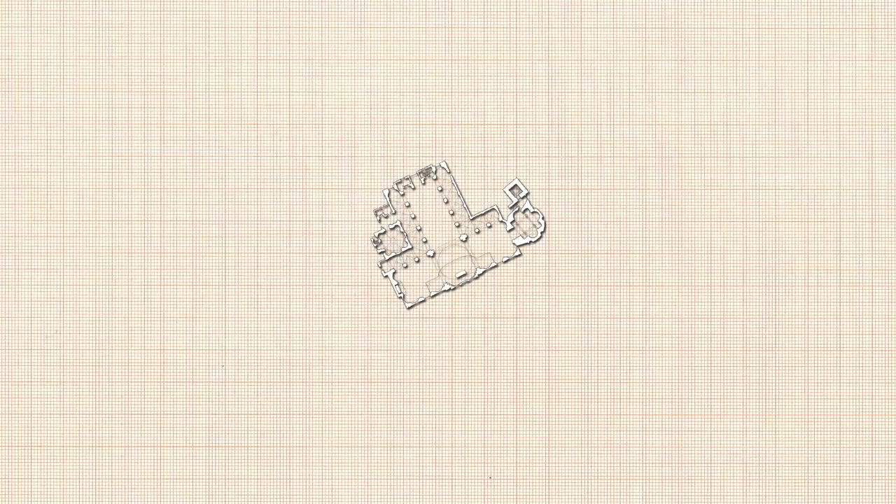In 1483, the main parts of the building had already been completed. The area made available to Bramante for the construction was limited by some houses and by a road called Contrada del Falcone, that is, Falcon Street. Bramante built a church with a T-shaped ground plan, a large central nave, and two lateral aisles that extended to the transept, but only on the north side of it.

Bramante did not have the room to build a choir on the south side of the transept. Therefore, by creating the optical illusion of depth with the artifice of perspective, he painted a trompe-l'œil of a choir by means of a stucco bas-relief showing three arches and a vaulted coffered ceiling. This created the illusion of a nave also on the south side of the transept.

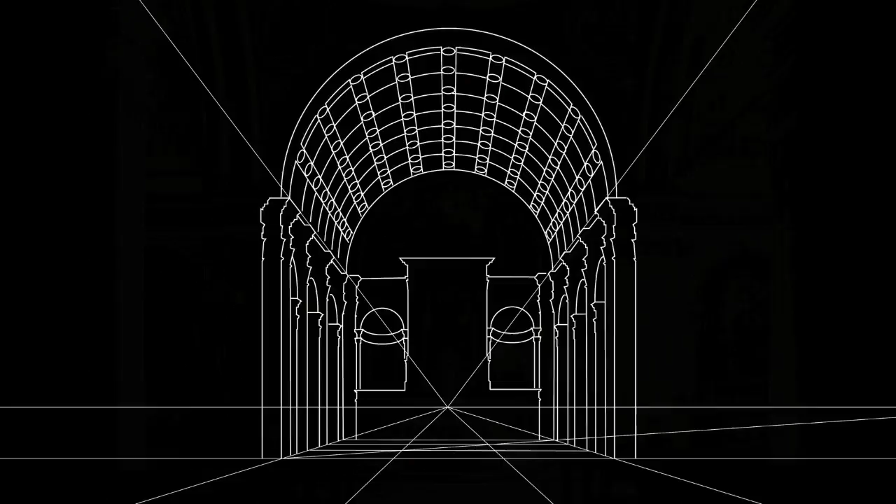The optimal point of view for observing the perspective is at the center of the nave, at the level of the fourth pillar. The central nave and the transept are covered with barrel vaults separated by four lacunars, and the arches are round-shaped. The side aisles are covered with cross vaults.

Above the cruciform pillars, adorned with Corinthian capitals, runs a beautiful decorated cornice. At the crossing between the central nave and the transept rises the cupola, decorated with gold and blue lacunars and illuminated by a small lantern at the top.

The cupola is connected to the pillars by four pendentives. In each of them, a tondo is inserted, showing the four evangelists, painted by Bramantino. The decorative band at the base of the cupola is marked by tondi in terracotta, with busts of the prophets, a work by Agostino de Fondulis.

In 1486, Giovan Antonio Amodeo was called to work at the church. He was commissioned with the facade towards the Contrada della Lupa, now Via Torino, following the instructions of Donato Bramante. However, his work was interrupted after only the base of the facade had been sculpted. Today, what remains of Amodeo's work can be seen in the rooms of the Sforza castle.

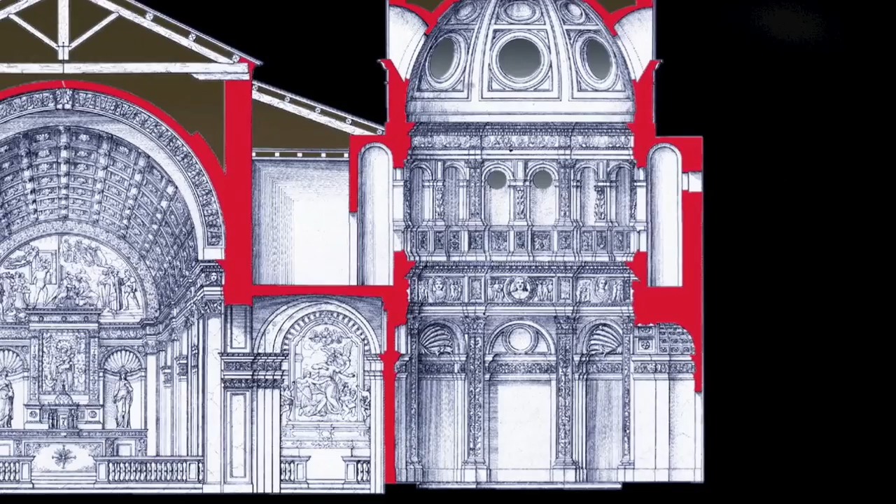In 1514, Giovanni da Oggiano opened two doors in the transept, granting access from Via Falcone. On the right side of the church is the octagonal sacristy built on two levels. On the ground floor, flat and concave niches are alternated. On the upper level there is a loggia with double-arch windows illuminated by small circular openings.

The sacristy receives light also from eight large windows in the cupola and from the skylight. Between the two levels runs a terracotta frieze with large heads and cupids, a work of Agostino de Fondulis. The original doorway opened onto the right aisle of the church.

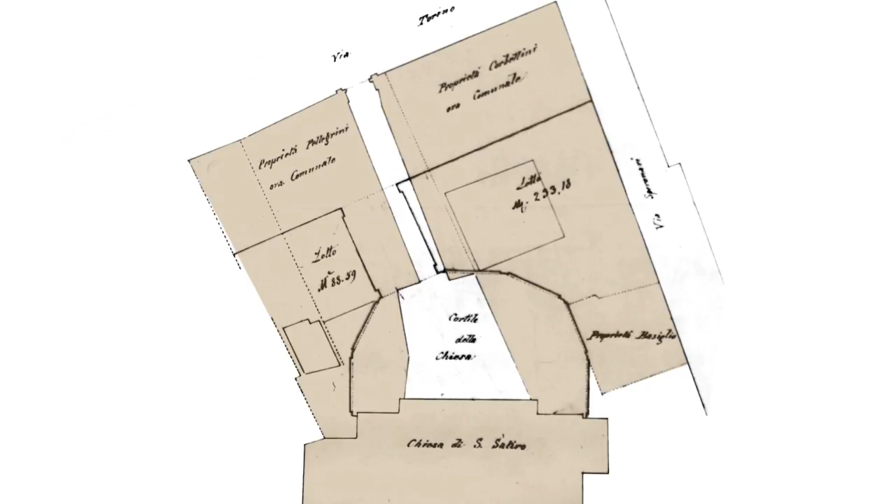The present entrance was created by architect Vandoni, together with the baptismal font. After the creation, in 1871, of the new small square facing Via Torino, Vandoni also realized the church facade, which had been left unfinished until then. The circular windows at the end of the transepts were opened in 1833.

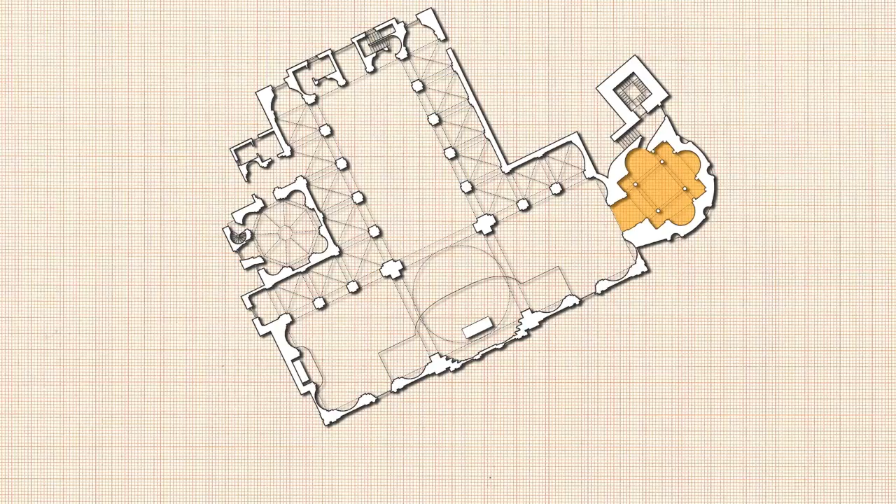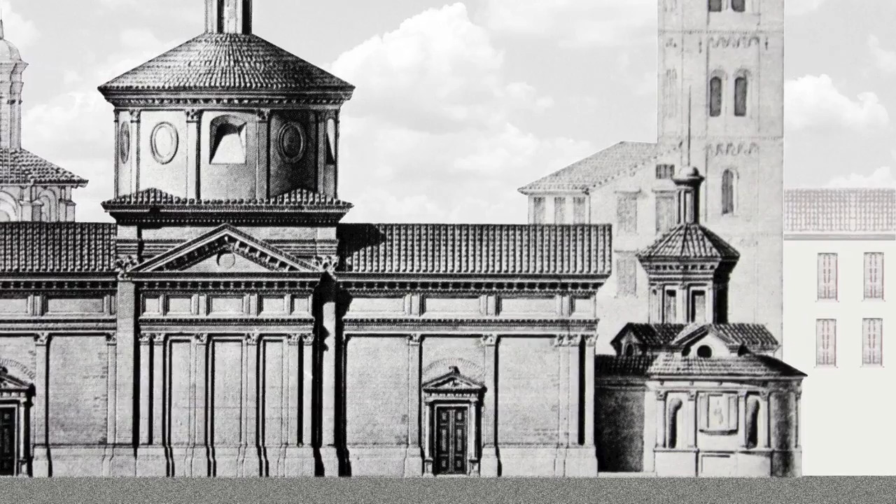The history of the Church of Santa Maria is closely linked to that of the sacellum of San Satiro, which is at the end of the left transept of the church. The sacellum was built at the end of the 9th century by the Archbishop of Milan, Ansperto da Biassono, as a private chapel, together with a cell for the monks of the monastery of Sant'Ambrogio, and with a hospice for the sick and poor people and for pilgrims.

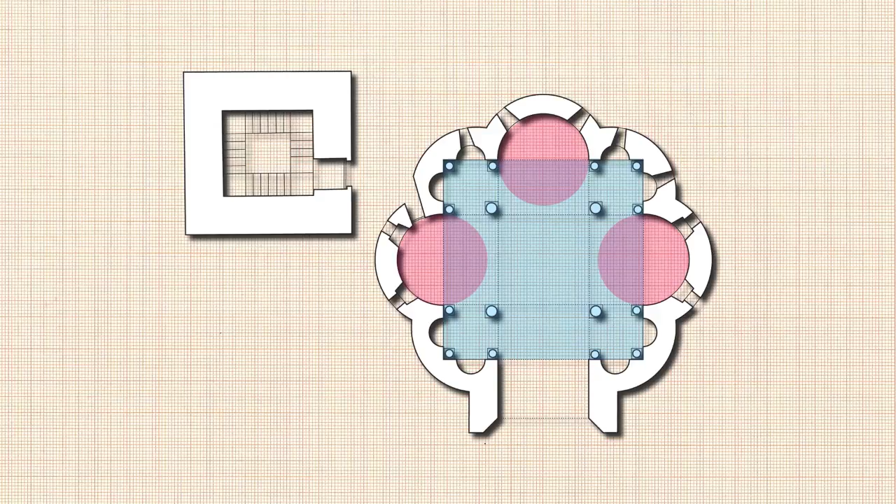The ground plan of the sacellum has the form of a Greek cross inserted into a square. It shows three apses flanked by niches. The roof consists of barrel vaults and semi-caps supported by sixteen columns of different materials with richly decorated capitals. Remains of frescoes recovered after recent restoration suggest that the interior of the building was once covered with paintings.

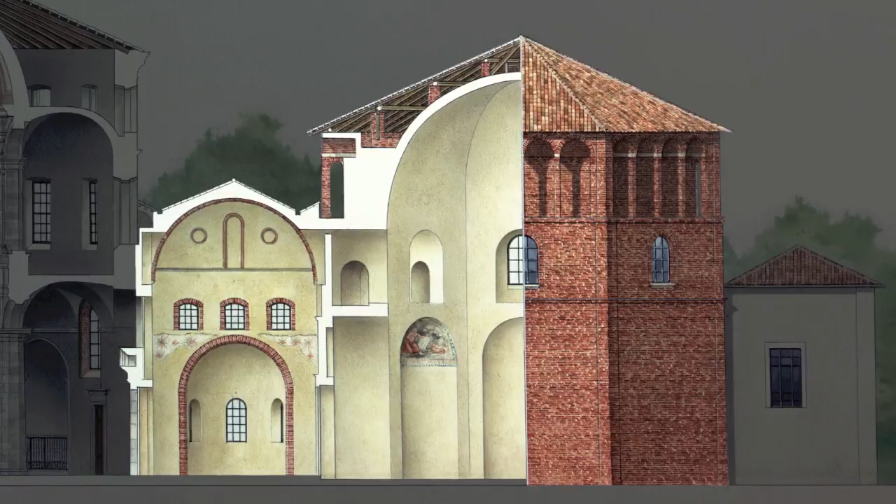Its architecture reminds us of Byzantine architecture, but also of the Chapel of Sant'Aquilino in the Basilica of San Lorenzo in Milan. In 1400, the sacellum was restored, probably in accordance with the project of Leonardo da Vinci. This seems to be attested by several drawings of the project, which included the consolidation of the perimetral walls.

Originally, a cupola was foreseen, but eventually the lantern designed by Donato Bramante was built instead, since in the meanwhile Bramante had taken over responsibility for the construction site. In 1518, the work was completed, and a group of terracotta statues by Agostino de Fondulis, depicting the mourning for Christ, was placed inside.

The church tower is on four levels, separated by indented ledges and hanging arches. It has openings that become larger on the upper floors, up to the elegant double-arch window of the belfry. Built in the 11th century, this is Milan's oldest church tower, after that of Sant'Ambrogio.

Today, the church tower that once used to be a landmark for pilgrims looking for hospitality remains, like the rest of the church complex, half hidden among modern buildings, almost a foreign body within the hectic traffic of Milan's city center.